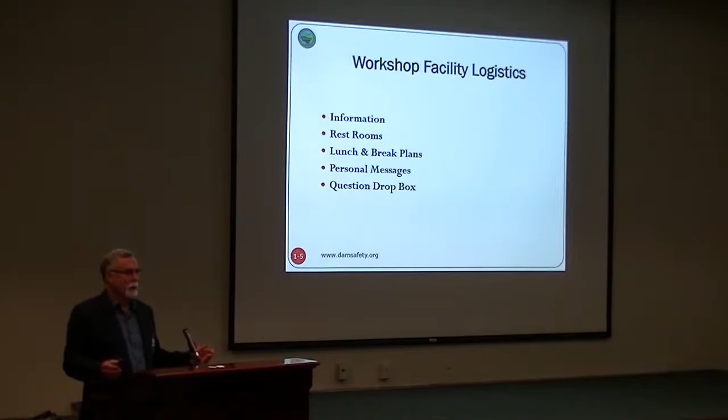So these workshops would not really be possible if the Association of State Dam Safety Officials, which is ASDSO, wasn't involved. And also FEMA does a lot of funding for these state programs. So between FEMA and ASDSO, that's what makes these workshops possible at a low cost. I mentioned you got the handouts in your bag, so refer to those as we go through at the end of the day. But there's a lot of good information in your bag.

A little bit about what ASDSO is. It's really a nonprofit organization. It's developed by the state dam safety officials. And there are 49 states that have dam safety programs. Alabama is the only one that does not.

ASDSO was established in 1984. But a little history, when I was with the Georgia program, Georgia, South Carolina, and North Carolina started what they call a tri-state dam safety conference. The very first one, I believe, was in 1980. The first conference was actually in Greenville, South Carolina. For the next 2 years, the next one was in Atlanta, and the next one after that was in Raleigh.

And then we decided, those 3 states, to say, why don't we make this a Southeast dam safety program? So we actually had a program in Orlando, Florida, for the southeastern states. But we invited all the states, and we said, all right, this thing is growing, we got to start looking at a national program. That's where it started in Orlando. We got most of the states came. We actually started a national dam safety program. And that was really the roots for the ASDSO as you see it today.

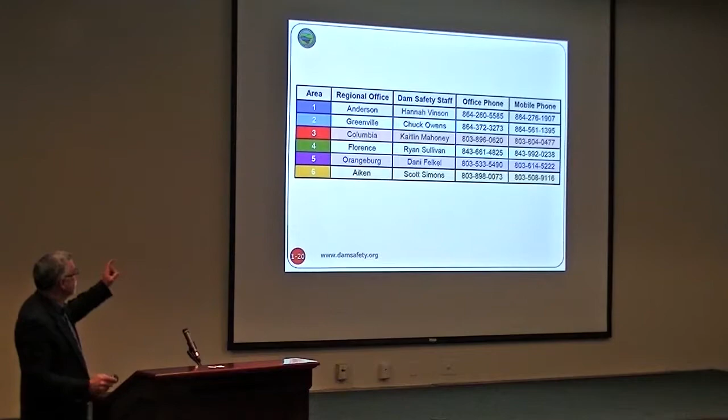Hannah is right here in Region 1, Chuck in Region 2, Kaitlin in Region 3 - though Kaitlin's not with us. Ryan in Region 4, right here. Dani in Region 5. Region 6 is actually vacant at the moment - Scott is still involved with the program but he's no longer in the region, so that's a vacant position currently.

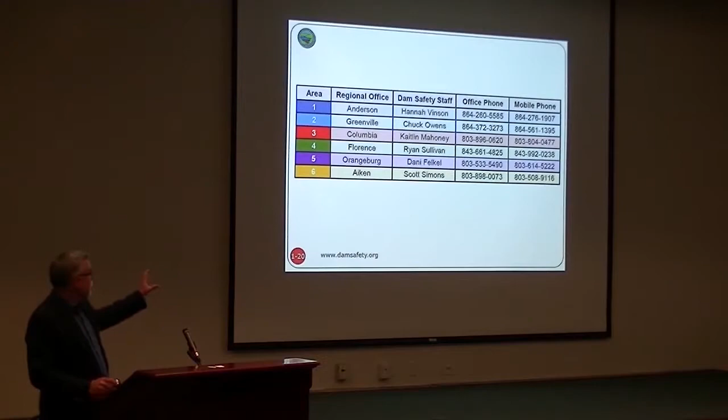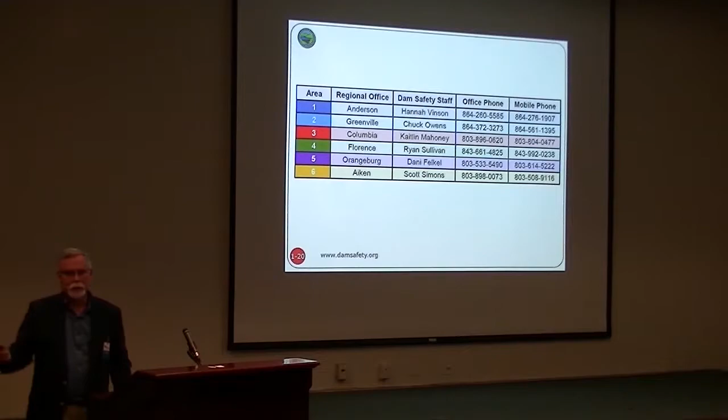This is their contact information - it'll be on that CD, but get to know them. That's your local resource in the region. Then you have the state office with Jill and John.

Additional resources: the U.S. Department of Agriculture, the NRCS, used to be the Soil Conservation Service. Those of you with gray hair will remember that. Back in the day they would actually design and pay for building a lot of farm ponds for irrigation and cattle drinking. So a lot of the older dams all over the U.S. had the Soil Conservation Service involved in designing those farm ponds. Now it's the Natural Resources Conservation Service, and in a lot of states they built what's called small watershed or flood control dams - there's over 10,000 of them in the United States.

They're a good resource with a lot of design aids since they were involved with so many dams. Your local water conservation districts can also be a resource - they have a lot of information on how to repair or maintain a dam. So get to know that person, they can help you too.

For bigger dams, you're talking about the Corps of Engineers, the Bureau of Reclamation, the Federal Energy Regulatory Commission. If you've got bigger dams and want to get really technical, they've got a lot of publications on dams that you can download for free if you're interested in the subject matter. And then there are local engineering consulting firms - a lot of them in the Southeast work on dams and have a lot of history and information on dams too.

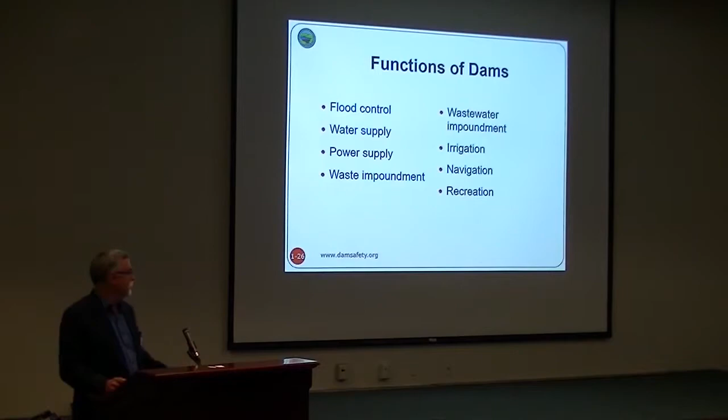Flood control - a lot of these NRCS flood control dams are strictly for flood control. Water supply - many municipalities have reservoirs for that. Hydropower, like South Carolina Electric and Gas. Waste and wastewater impoundments - you'll see this at a lot of water treatment plants, generally small dams used for sediment, dropping out sediments in the lake before they treat the water. Irrigation for farmer use, navigation along the rivers with lock and dams, and almost every lake has a recreational component.

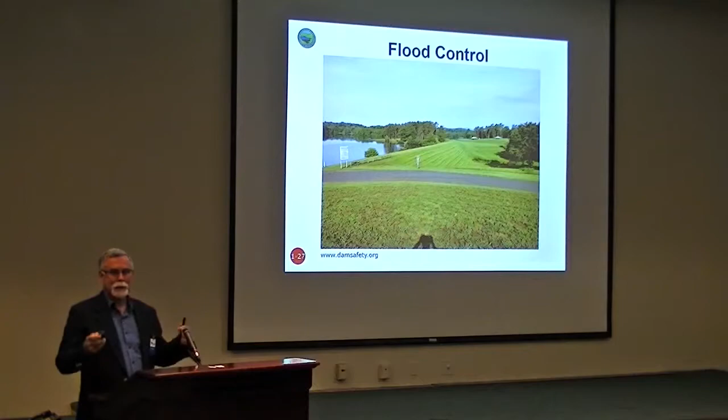The flood control, this is a typical NRCS dam, and a lot of times they'll have a reservoir out in the lake, but a lot of times there'll be a large distance in elevation from the lake level to the top of the dam. That's the flood storage. So if you have a big storm, the lake goes up, slowly drains back down.

Water supply can be any type of dam, but there's a lot of them in South Carolina, obviously. If you're going to have these water supply departments, you can't just pump from a river or a stream all the time because you may be in a drought. So they'll build a reservoir so when there's a drought, there's a pool of water they can draw from

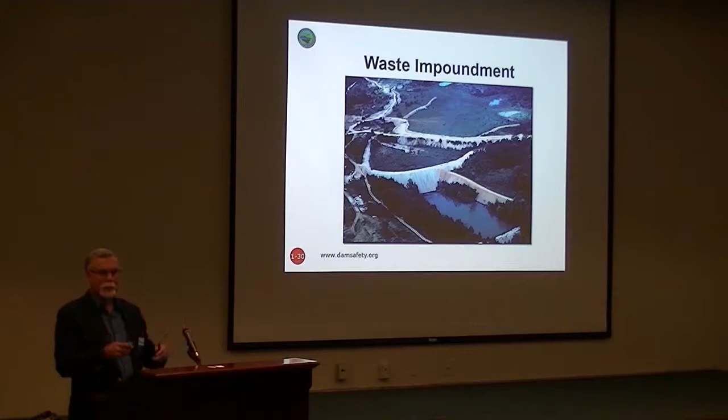to treat. Hydropower, waste impoundment, a lot of clay mines, gold mines, they have to have a place when they're sluicing and cleaning up to get the minerals. They have to pump that water behind the dam to let it settle out before the water goes to the stream. Here's one that the kaolin industry uses a lot of dams. Wastewater storage, usually these are not large dams or large lakes, but there's a lot of them out there.

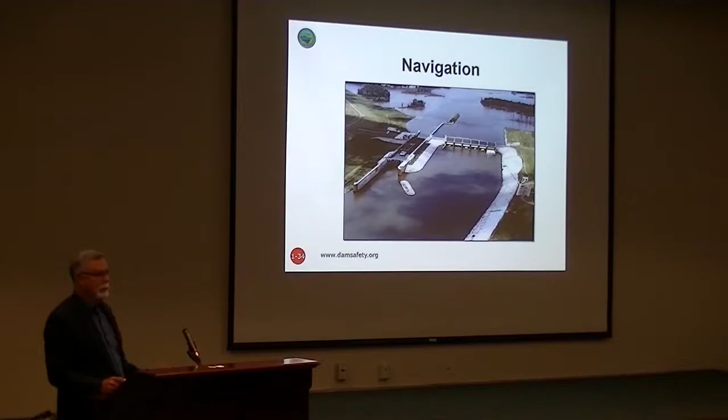Now the irrigation, particularly out west, and then the lock and dams along the rivers themselves. So here's actually, like in this case, the dam and the spillway, they're all, a lot of times they're one and the same, and then here's the lock chamber itself. And then, like I said, almost every component is recreation.

Quickly, type of dams. Over 90% of the dams in the U.S. are earth-filled dams. So the vast majority, generally it's cheaper to build a dam out of earth if you have it. You can have rock fill where most of the dam looks like a pile of rock, but in the center there is an earth component to keep the water from flowing through.

Concrete gravity dams are old masonry dams. A lot of the old mills in the southeast that are masonry dams built out of rock. Gravity dam is just like the word. They're built out of mostly concrete and they're there with weight. The gravity is what holds it down and keeps it from tipping over.

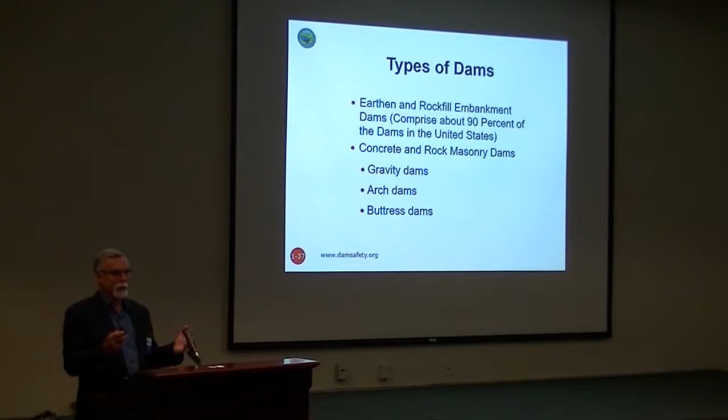You can have arch dams. You see some large ones, particularly in Europe. And an arch dam is designed because you don't have to use a lot of concrete, using the curvature of the dam to resist all the forces wanting to turn the dam over. So you got to have the right geologic formation to have an arch dam.

And a buttress dam I'll show you. In the old days when labor was cheap, you see a lot of buttress dams. But now that labor is not cheap, you don't see really any new buttress dams being built.

Then there's the oddball dams. You can find a steel dam, not many. What's called a rubber dam - a lot of times nowadays you'll see some fairly large dams, actually they're rubber bladders that hold back the water, and wood or timber crib. And those are generally your older dams also.

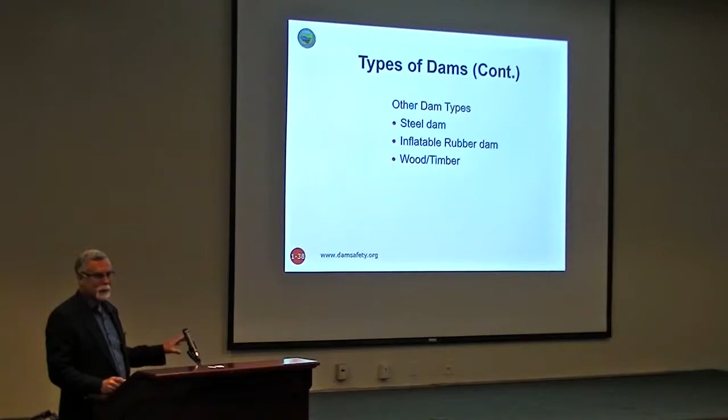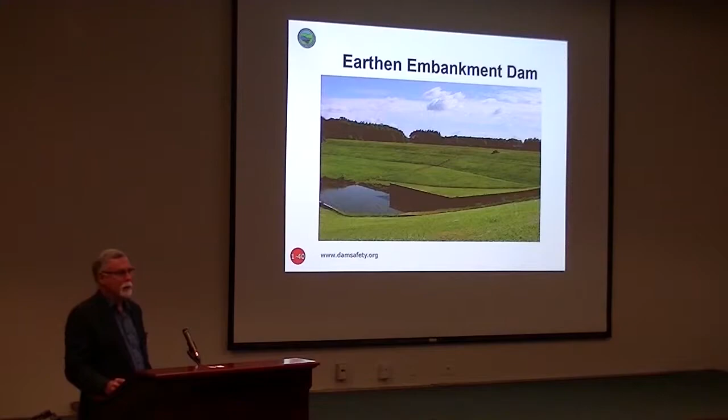Earthen dams are just like it is. It's earth, grass. It may be a zone embankment. It may be made up of a couple of different types of earth. But like I said, over 90% of them in the U.S. are earth dams. You might recognize this as Saluda Dam.

The original dam, which is the green part, was what's called a hydraulic fill dam. It's basically earth, but the center of the dam, the way they built it, was they pumped water into it, let the water settle out, and that would be your clayey fine material. The problem with that construction - you have an earthquake, that material that was pumped in there becomes liquid again and causes the dam to fail.

It's referred to as a buttress dam. You can tell it doesn't use as much concrete as a gravity dam. Back in the day when labor was cheap, you could do all this form work, but nowadays, because labor is not cheap, you don't see many buttress dams being built anymore.

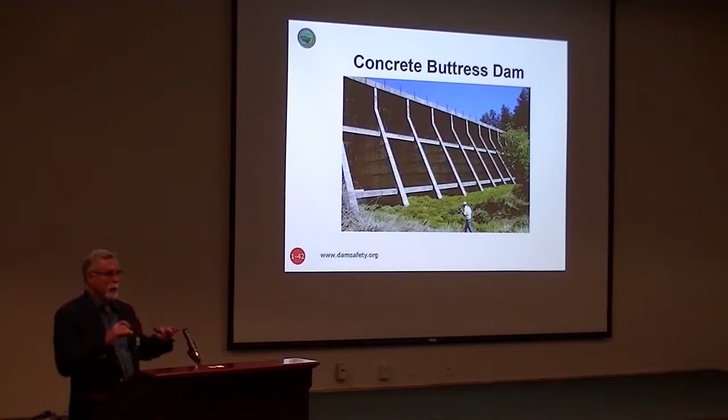The problem with these, particularly in an earthquake zone, is when the earthquake wants to move the dam left and right, a lot of these buttresses would collapse. So the way they fix those is they basically infill between each one of these buttresses with concrete, making them more like gravity dams. That was the repair method to make them resist large earthquake events.

The only steel dam I'm aware of is actually made out of steel. I don't know if you're going to find any in South Carolina. A rubber dam, you don't see the dam, but it's actually a big rubber bladder, and they just put air in it. This is one in Arizona, and actually they replaced it. They changed it because you can imagine the heat and UV light deteriorated the rubber. They actually had one of these break, deflate, and drain their lake. So they ended up putting in steel gates maybe 2 years ago. You see a lot of smaller rubber dams, maybe 5, 6, or 7 foot high, but these are like 30-foot high rubber dams, one of the biggest ones in the U.S.

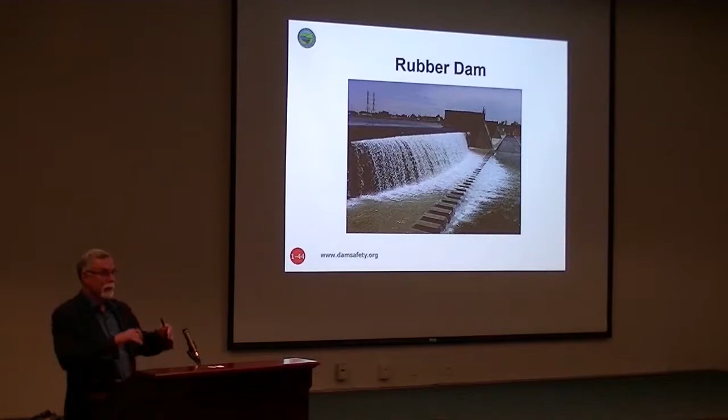Timber crib, an old dam design. Even here they're restoring one with timber crib. Basically, it was timber crib and in between was rock. So you say, well, doesn't the dam leak? Hell yeah, it leaks. But the problem was, they're on such a large watershed, it can still leak but still keep a reservoir. You would have water just flowing through the rock, but there was enough resistance that it wouldn't drain the lake. So a lot of old ones are built this way, kind of a run-of-the-river type structure.

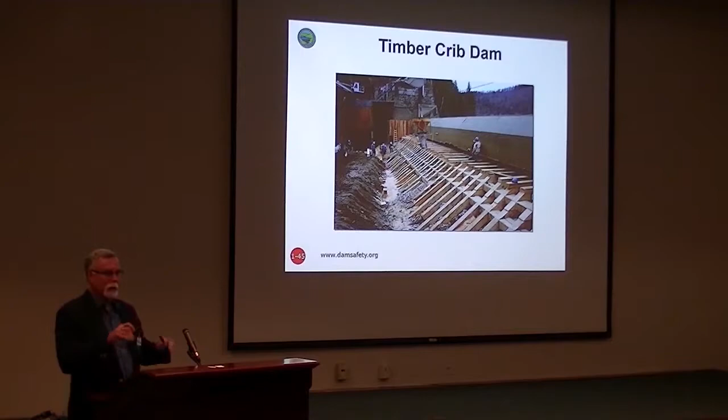But you got to remember, regardless of the type, you got to inspect it, you got to maintain it. Each one has a little different set of things you got to look for. We're going to mainly focus our comments on earth-fill dams, but if you own a concrete dam, please, if we don't address your comment, ask a question at the end of the day.

Let's talk about parts of the dam. I want to make sure when we use terminology as engineers, we're all talking the same language.

Reservoir is an easy one. The principal spillway is the spillway that controls the normal pool of the lake. Generally, it's a riser structure out in the lake connected to a pipe that goes to the end of the dam - that's called the principal spillway. The upstream slope is the slope on the water side. The crest is the top of the dam. The groin is where the dam meets the natural ground, and that's important because a lot of problems can occur where the dam meets the natural foundation.

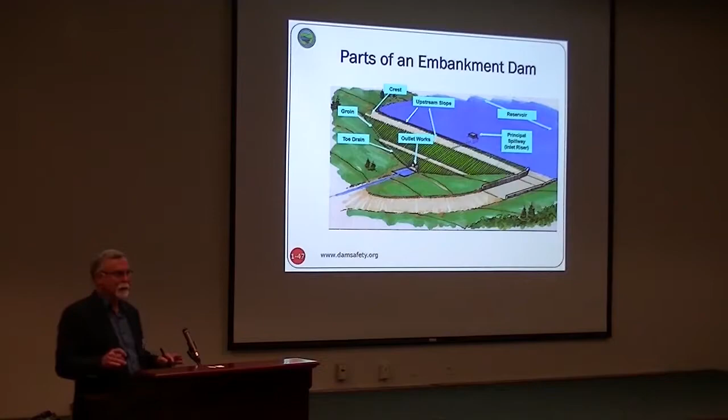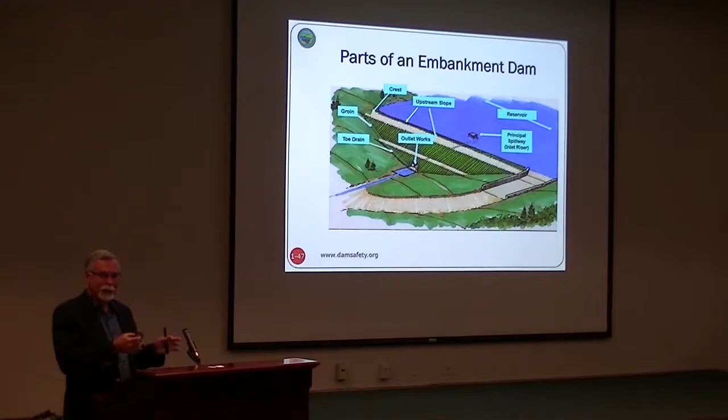The outlet works is where the pipe comes through the base of the dam at the downstream slope. A toe drain is what prevents a dam from seeping, because keep in mind, all dams will leak - that's guaranteed. What you want to do when water comes through the dam is collect it. So what we call a toe drain, we may also call a trench drain or a chimney drain, is actually a drain made out of aggregates, generally sand and gravel, that's in the dam to collect that seepage before it comes out the back side through a pipe. Most old dams don't have them, but any new dam will have some type of internal drainage system.

That's where you have a toe drain outflow. What's good about it is you want to be able to measure the flow of water coming out of these drains, because that's an early indicator if you've got a problem. That flow should almost be fairly constant, but if you see it triples in rate or it goes away, something's probably bad going on inside your dam. If muddy water is coming out, that's a problem too - it should always be clear, almost like a spring, because it's going through a sand filter. But if it becomes muddy, you've got a problem.

So those are the type of things you look for when you're mowing your grass - you take a look at your toe drain. Now I got water coming out, I never had water before - those are early indicators of the possible distress of the dam.

Emergency spillway, or what's called an auxiliary spillway. If you have a big storm event, those are the spillways where the floods go through. Sometimes they're concrete, but most of the time they're what we call vegetated, grass-lined spillways.

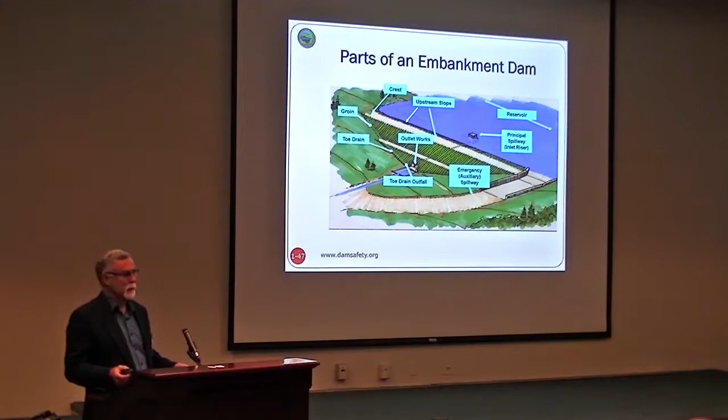I'm going to take a slice through a dam now, and this is a well-designed dam. You have your riser, it goes through the outlet pipe. This is what's called a zoned embankment, made up of two different types of soil. The core is your more clayey, impermeable soil, and the shell material, the soil on both sides, can be less impermeable.

In this case, you have a vertical filter drain that goes to a blanket drain, so any water wanting to come through this material gets into this drain and drains out. It keeps the back of the dam dry. That's the main purpose of these drains—if the back of your dam becomes saturated, it becomes unstable, and you can potentially have a slide and lose the back of the dam. So these drains keep the back of the dam dry.

Sometimes you'll have a berm, or a dam will come down with a berm. On a tall dam, you generally have berms because otherwise rainwater flowing down a 60 to 80 foot zone is more inclined to erode your dam. So a lot of times you'll break that up with a berm and collect that water, running it off to one of the groin areas.

Here in South Carolina, on the coastal areas, there's a lot of sand, and water goes through it fairly quickly. If you have a dam, you've got to have a cutoff to prevent water from running under the dam. So you have something like a sheet pile wall or cutoff trench to make that water's path more difficult to go under the dam. One thing you want to do is increase the path seepage has to follow, which decreases the velocity and decreases the quantity. So you just want to increase that seepage path.

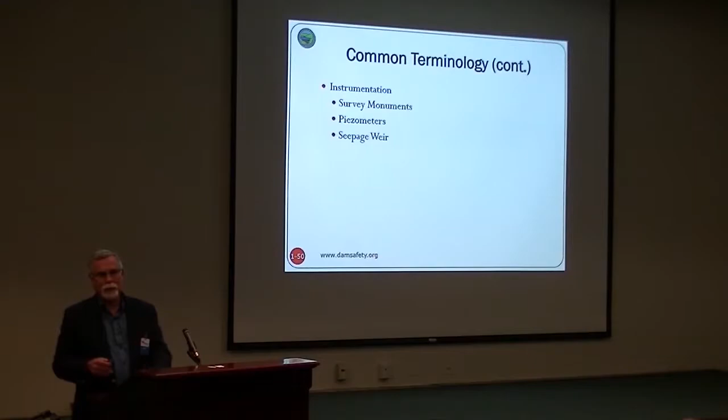Downstream slope, pretty obviously, is on the downstream side of the dam. Abutment and groin—as I mentioned, here's the dam, here's the natural ground, so this is the abutment and groin. Like I said, you can build a real good solid dam that will minimize seepage and be very safe.

But what's also trying to occur with that reservoir is water trying to go through the natural ground too, and you don't know what that consists of. So you've got to be careful, because sometimes your dam may be perfectly dry, but the next thing you know, you've got water coming out of the side, and you can have a failure of the foundation of the dam—if the foundation fails, that will cause your dam to fail. So you've got to not only look at your dam, you've got to look at what we call the abutments, to make sure you don't have water coming out of that.

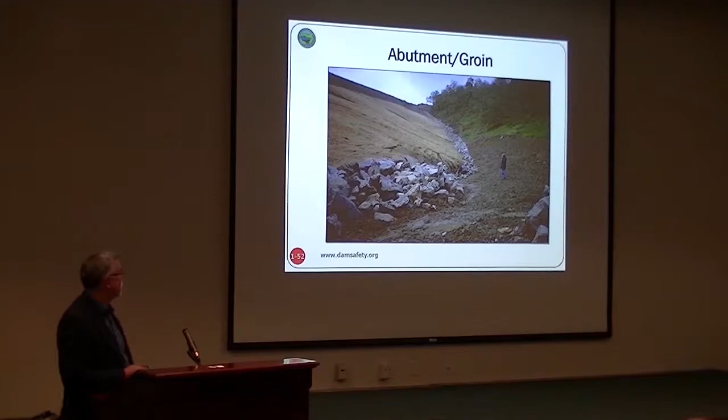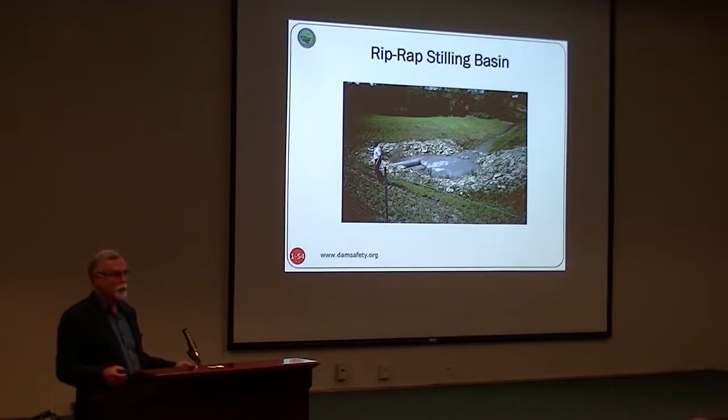When the pipe comes out of the back of the dam, the water coming out of those pipes can be moving 30 or 40 feet per second, and it can really cause some erosion. So you have to have what we call a stilling basin or a plunge pool. When that water comes out, it falls down, and that slows the velocity of the water in the stream.

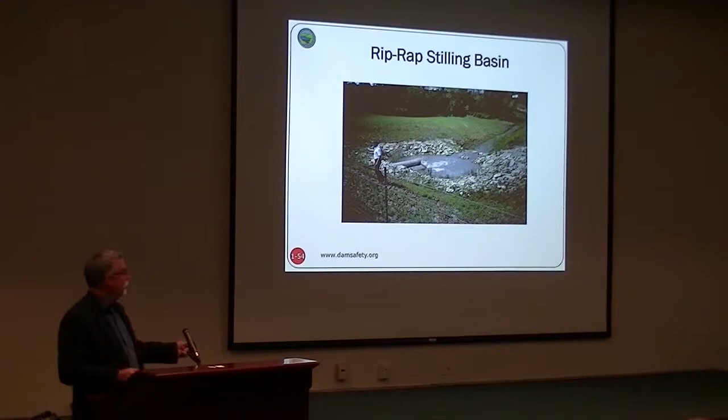So you've got to generally have riprap to protect the downstream area. I mentioned trash guards—here are some examples. You want leaves and everything to go through; you just don't want sticks and logs to start building up, with leaves matting over the spillway opening so your principal spillway doesn't work. You see all types of different trash guards, but you need one to prevent sticks and timber from getting down inside your pipe. But believe me, they're hard to get out once they start going down into the riser pipe.

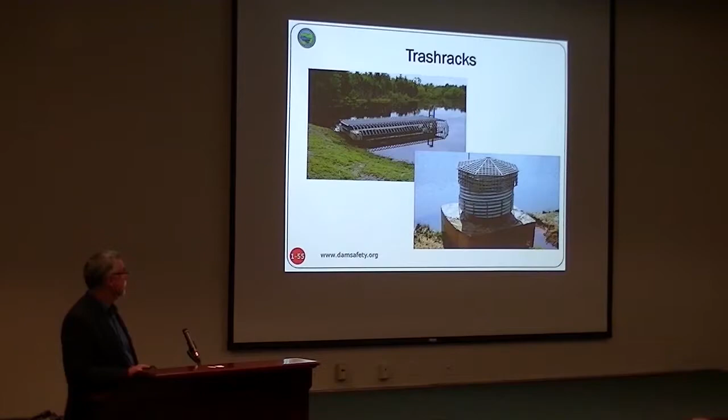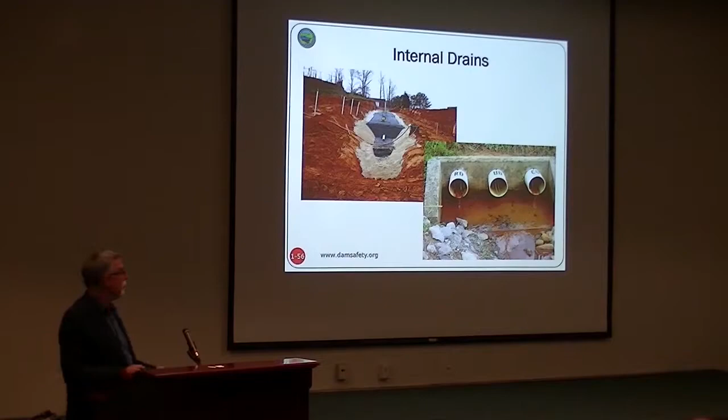And then you have the outlets. Here's the right drain, the upstream drain, and this is called the chimney drain. You label them so you know where the water is coming from. And you'll notice these metal things - those are called animal guards, because animals love to get in drains. These guards keep muskrats and other animals from climbing up into your drain and building a nest. That's important, because if they get up in your drain, they'll clog it up.

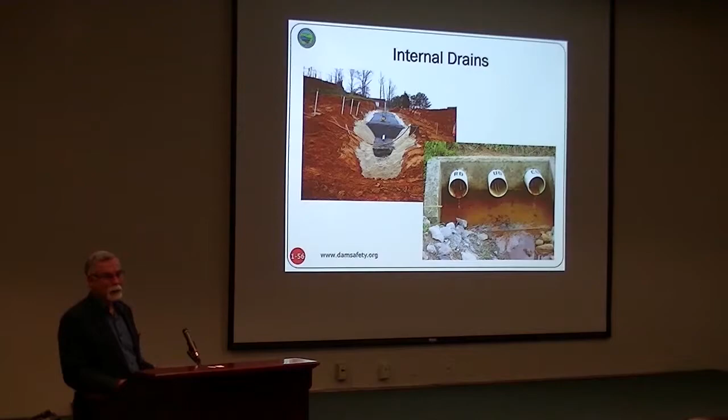The riprap - if you've got a big enough lake, you have to worry about wave action causing erosion of the upstream slope of the dam, and generally riprap is used to prevent the wave from eroding the face of the dam. If you've got a small lake, just a grass slope is adequate.

We use the term freeboard - that's the distance between the lake level and the top of the dam. As I mentioned, every dam acts as a flood control dam, it holds back some water. I'll show you later what's important in terms of your spillway capacity - a lot of it is based on that distance from the lake to the top of the dam.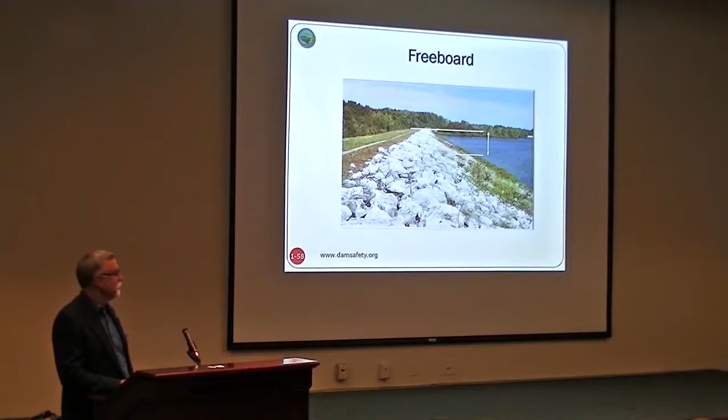A little bit about instrumentation. Monitoring wells are basically holes drilled in the dam. They've got a perforated pipe, they've got sand around it, and it measures and shows you where the water level is inside your dam.

It's important because when you measure those, that water level, unless you have a real long period of rain, should stay about constant. You measure if it's going up or down - something's going on inside your dam. It's generally not a good thing.

Seepage weir - if you don't have those drain pipes I showed you, a lot of times it's just a channel going into a V-notch weir, and you can measure the flow rate coming out of the V-notch weir. There are different levels of instrumentation - Saluda Dam has a ton of it. Obviously it's a large dam, so there's a lot of different, more complex instruments. But for probably 99% of you guys, you may eventually have a monitoring well, you may eventually have a seepage weir.

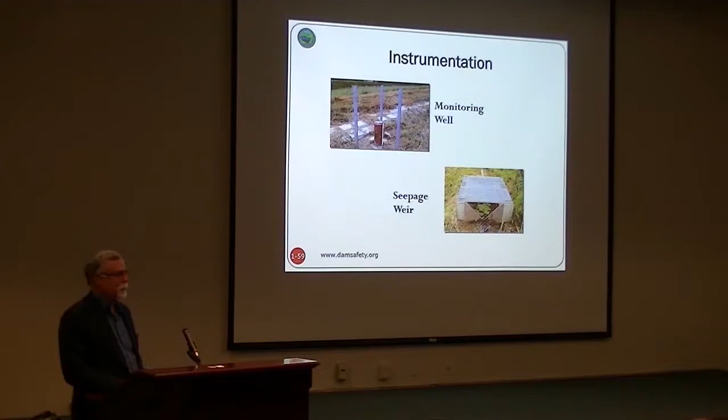Quickly on types of spillways, because there are different types and reasons for different types. You have conduit, which are pipes or culverts, open channel spillways, which is just like it says an open channel, and then you have what's called weir spillways, and there's different types of weirs which I'm going to go over. This is the only math we're going to do today, so don't worry.

This equation is important though. I want you to understand, when you're talking to an engineer, Q is the capacity - it's like cubic feet of water per second. The equation tells you how much water your spillway will pass. There are three variables: C is a coefficient, it depends on the shape of the top of the spillway, and I'll talk about some of those. That value can range from about 2.5 to 3.5.

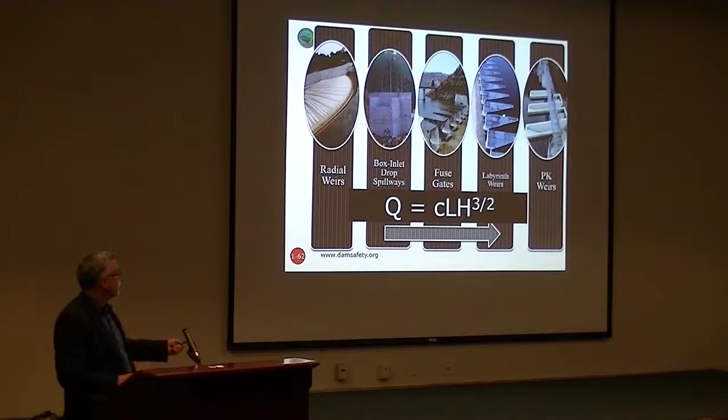L is the length of the spillway. Simple - if I've got a spillway 100 foot wide, that's pretty straightforward. But nowadays you've got different shapes of spillways to increase that length within the same width of channel. For example, this is a labyrinth spillway, so it's kind of like a zigzag - your length is actually the length of each one of these segments, so you can get it very long.

What's important is the H, because that's raised to the 3/2 power. So the H is the height of water over the spillway.

So if you need a lot of spillway capacity, increasing the H is better than trying to change the C or the length. And this goes back to freeboard. If you've got, say, 5 feet from normal pool to top of the dam, that's what your H is. A lot of people say, well, I need more spillway capacity. The best way is to increase that H. Lowering your lake increases that H. Raising the dam increases that H.

So a lot of them, you talk to the engineers, they're going to come to you and say, can you live with your lake being lower 2 feet? If we do that, that H number goes up. Or is there a practical way to increase the height of the dam a little bit? Again, that gives you that H. So those are things, when an engineer is talking to you, you've got to make a lot of long-term decisions. But that's the equation that tells you my capacity to spill.

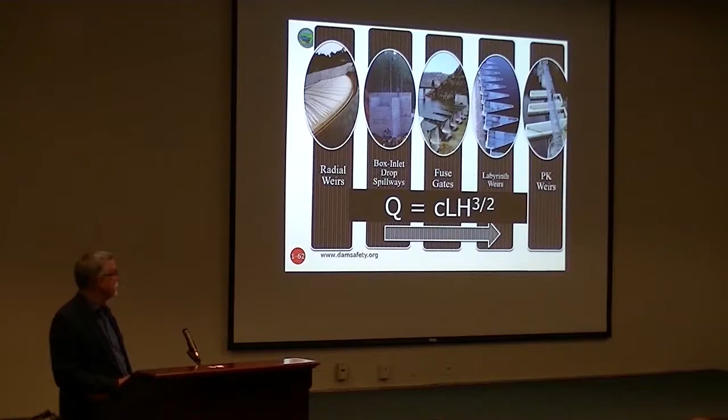A little bit about conduit spillways. Usually it's a vertical riser pipe connected to a horizontal outlet pipe. In the old days, those pipes were made out of corrugated metal, and those have a design life anywhere from 20 to 40 years, and eventually they rust out.

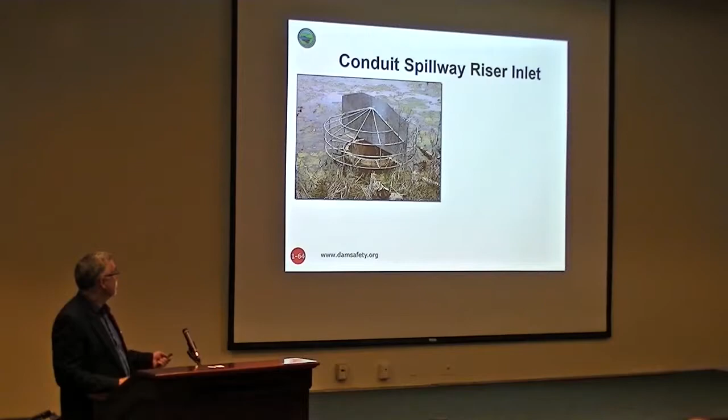Let me show you kind of a cross section. Here's the inlet, the pipe. In the old days, we used to put what's called an anti-seep collar, because any penetration through a dam is a weak point - that's where the water is going to flow around along that pipe. So to prevent it or minimize it, in the old days we put these collars so that when water is running along that pipe, outside of the pipe, it has to go around these collars, increasing that seepage path.

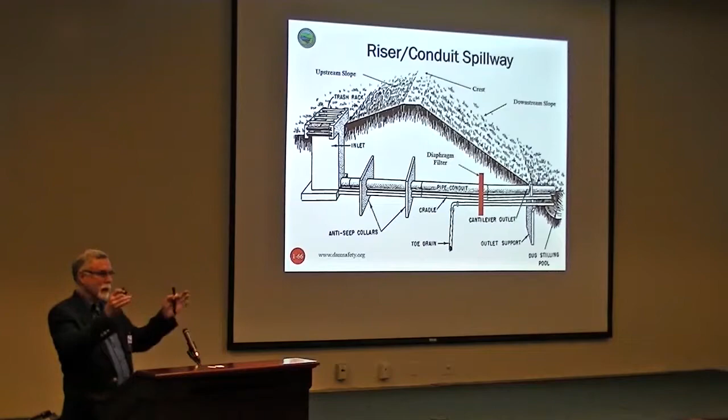You increase the seepage path, it slows the water down and prevents it from generally causing a big problem. But we found over the years that those are difficult to construct, and if you don't compact the soil around it really good, then it really doesn't do you any good. Nowadays we don't use them - we use what's called a diaphragm filter. It's a sand collar, if you will, around the pipe.

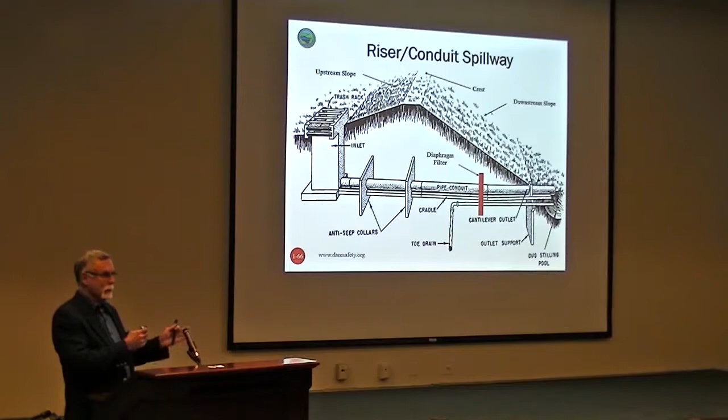So if water is leaking along the pipe, it hits that sand. The key to that is, again, water coming through a dam is not sometimes a big thing, but if it's carrying soil with it, that's when you create problems. So over a long period of time, carrying that soil will end up with a void in your dam, and your dam may collapse. So these collars prevent the soil from leaving. It doesn't prevent the water from leaving, but it prevents the soil, and that's an important aspect of it.

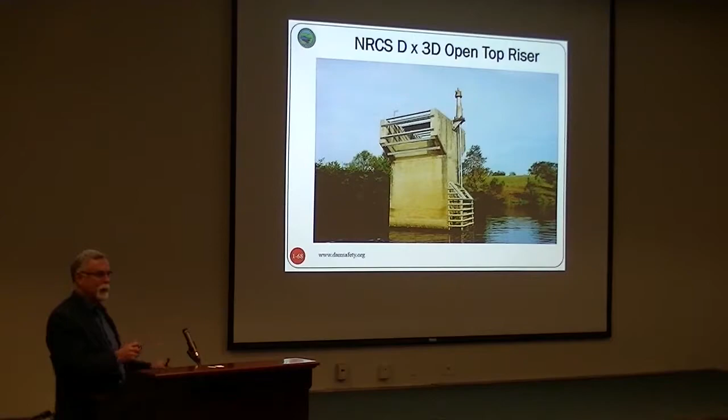This is an NRCS small watershed flood control project. You see what's referred to as the D by 3D - their riser structures are generally D width and 3D long. They're rectangular. They found over the years through research that for their type of application, that shape of riser is the way to go - it's the most efficient.

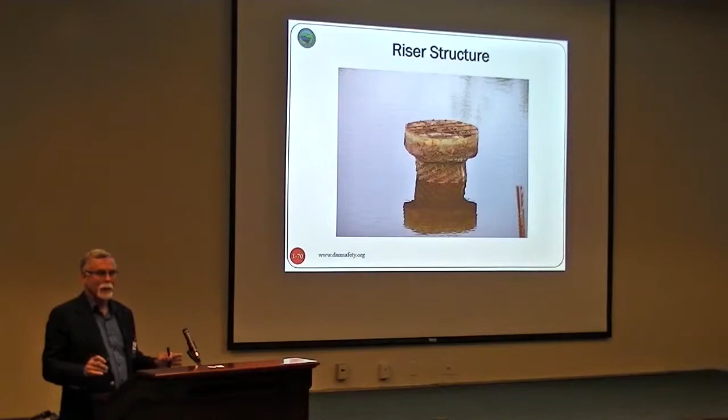They work fine for a long time, then eventually they're going to fail. Here's one where you can see the condition of the trash rack - the erosion, the corrosion - they actually put a concrete cap around it where they had a leaking joint. But these things are just a ticking time bomb. They will fail, so if you have them, it's just a matter of time. You need to really start thinking about replacing them if they're more than 20 years old.

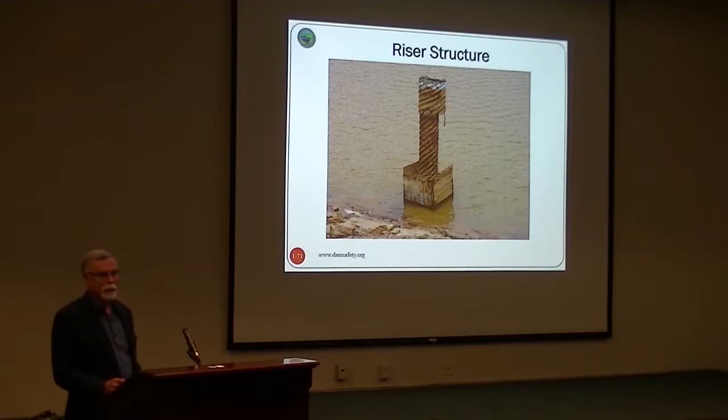Let's talk about outlet protection. When these pipes flow full, you get 35 to 40 feet per second of water. This is a 30-inch pipe, and it can create a small Grand Canyon below the dam if it's not protected. Here you see the riprap. You've got to protect downstream, because otherwise that erosion starts eating back into the dam itself, creating problems.

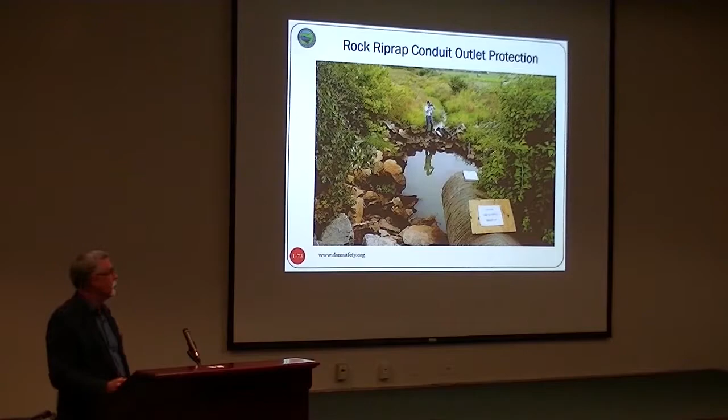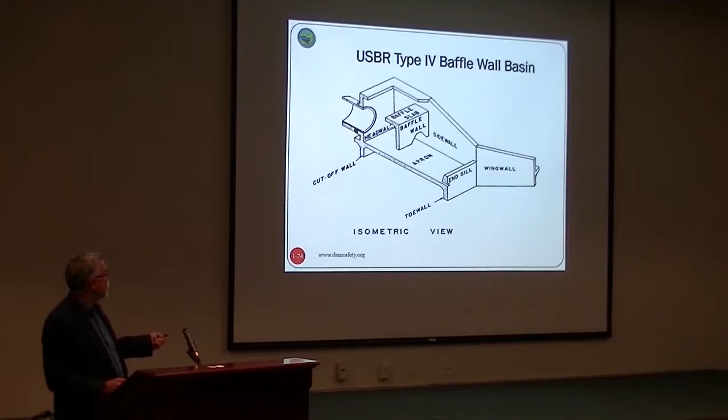Sometimes plunge pools, riprap is generally the simplest way to go. Here's a U.S. Bureau of Reclamation baffle wall basin. The water comes out of the pipe, hits this wall, drops straight down, and then flows up. This is what they actually look like.

Here's what's called a drop spillway. If your dam's not very high, the best way to dissipate energy is to have that water drop down vertically, making that velocity go vertically and not horizontally. The water comes into this and drops straight down over this head wall into what's called an apron, and then flows out of the channel.

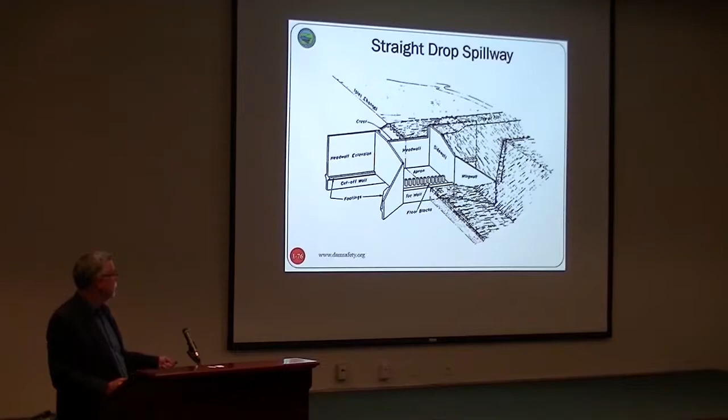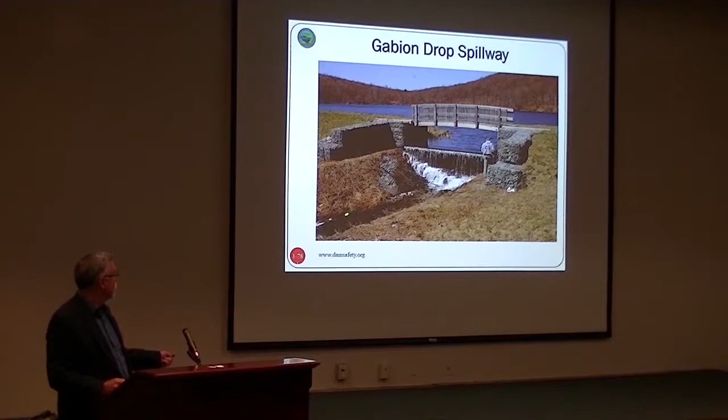Here's one made out of gabion - a wire basket filled up with stone. So instead of concrete, this one is just made out of these gabions, but it's the same concept. The water drops vertically down. You can see in the channel itself there's no riprap because the velocities are very low.

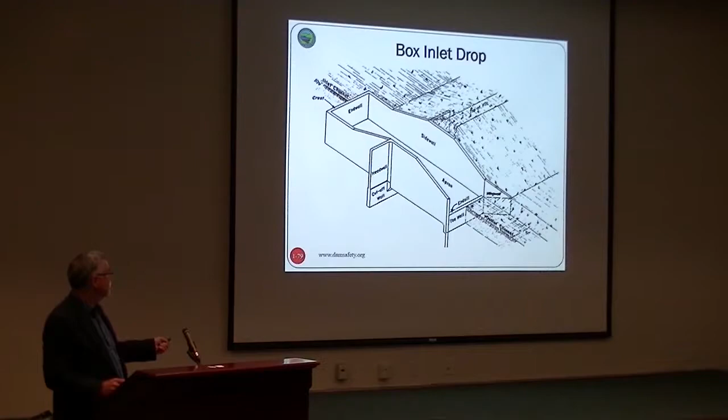So here's one - when the lake's full, it can flow over on 3 sides. The problem with this, it's almost like a boat - that spillway is going to want to float. So these concrete structures have a lot of mass to prevent them from floating up. While you increase that L to get spillway capacity, you add a lot of concrete to keep the thing from wanting to float.

If your dam gets high, you can't have these drop spillways. You can't have a vertical drop of 50 feet. So now you've got to get the water from the top all the way down to the toe of the dam. You generally do that with a chute spillway.

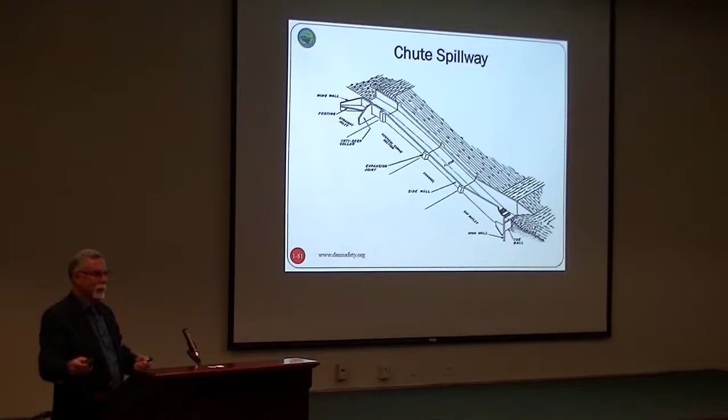Now we're talking big bucks. So now you've got not only the weir structure up here, you've got all this concrete, and this water is going 35, 40 feet per second. You've got to have a nice stilling basin to get that 40 feet per second down to like 7 feet per second when it goes out downstream.

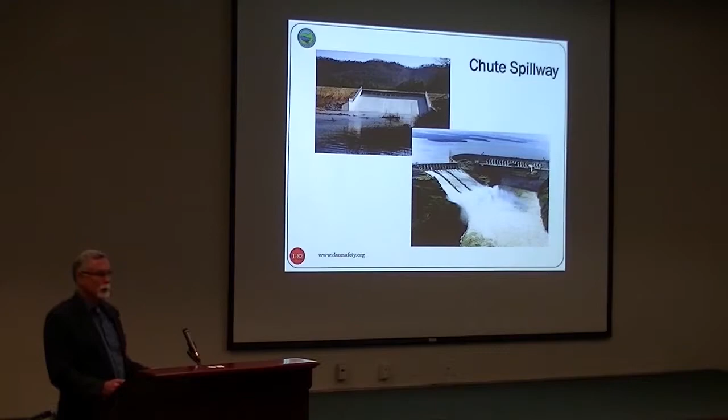They can be these large dams all over the world with these huge spillways, passing millions of CFS. Here's one that's not flowing, but they're expensive because there's a lot of concrete. You don't see many of these.

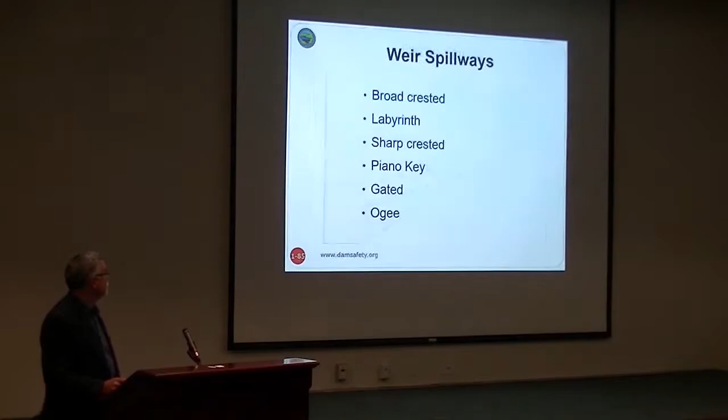Let's talk about the weirs, because this is where that C factor comes in. We've got generally 6 different types of weirs. What's called a broad crested weir is when it's flat, right across the top of that water. This is the least efficient of all the weirs, but they're easy to construct. You see a lot of them.

This is an ogee weir. Now that C goes from a 2.5 maybe to a 3.5, and you make them with curvature. But you can tell it's a lot more concrete and a lot more finishing - a little more complex, but it costs more to build.

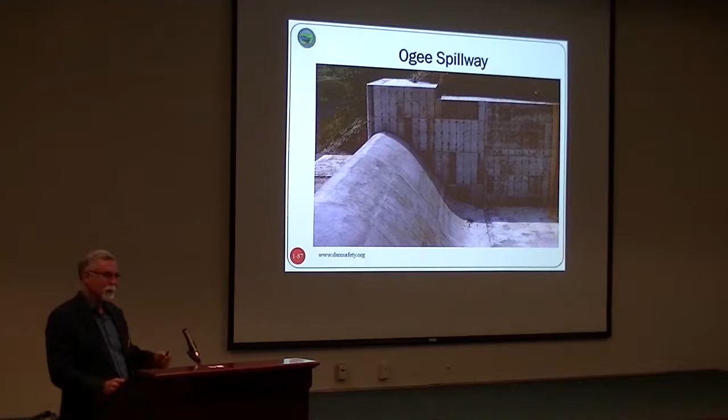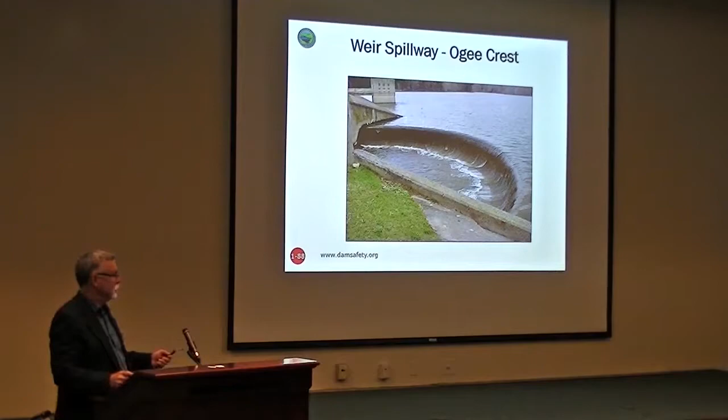And here's a weir - instead of being straight, they made it curved, so you get the ogee, but you also increase the length. So now I'm getting a little more capacity by making it a curved ogee weir.

Have you ever been out to Hoover Dam? They have these side channels, and here's an ogee section. The water flows over here, then runs down the channel, and at Hoover Dam it goes through a tunnel.

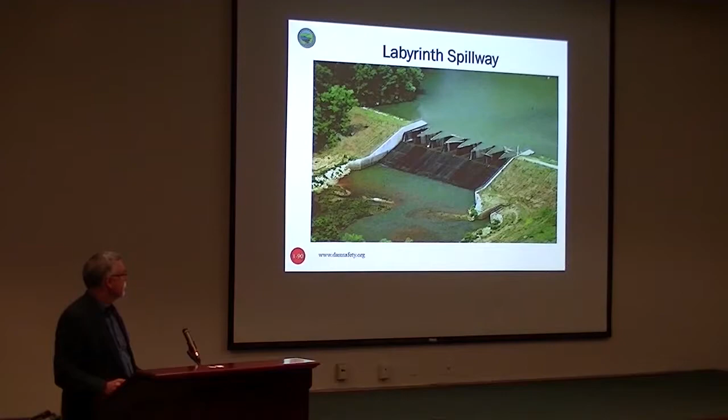Nowadays, you see a lot of what's called labyrinth weirs. We want to increase that L, but we do not want to make the spillway real wide. So you see the L is lengthened by all this zigzag. Very popular these days—they're concrete, with a small chute, so the water goes over these and runs down the chute into the spillway.

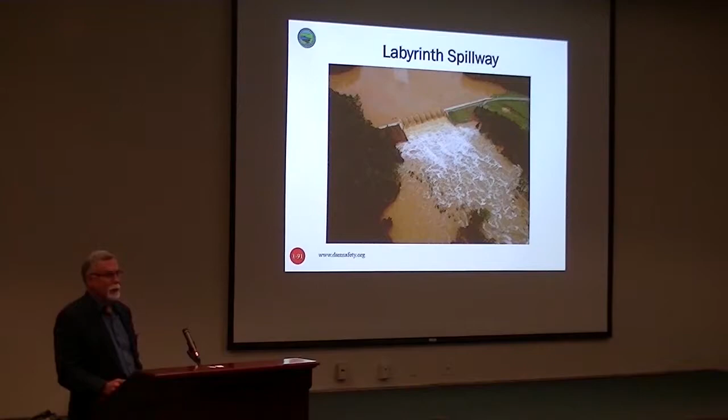Here's one operating during a flood in Georgia. They pass a lot of water. They can be different—what we call each one of those zigzags is called a cycle. So here, each one of these is a cycle.

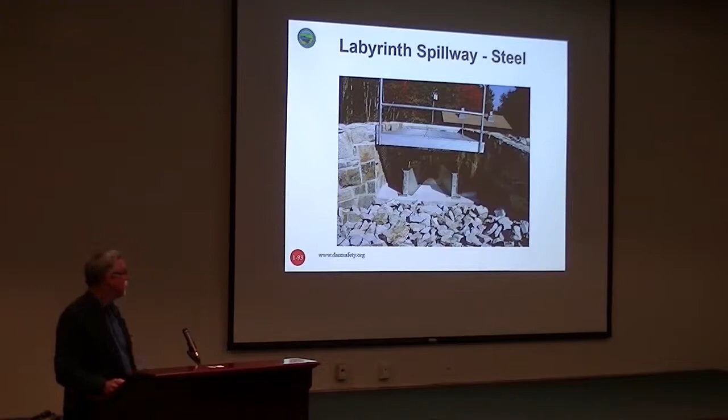Here's one made out of steel, a small one. Instead of concrete, the zigzags are made out of steel plate—not very hard. This one with a single cycle has a county road on top of the dam, again with the chute.

So when your engineer comes to you and says we've got to somehow get a lot more water through your dam, those are the kind of options he's going to sit down and talk to you about—the advantages and disadvantages and the cost. And you can well imagine, when we start talking concrete, they're not cheap.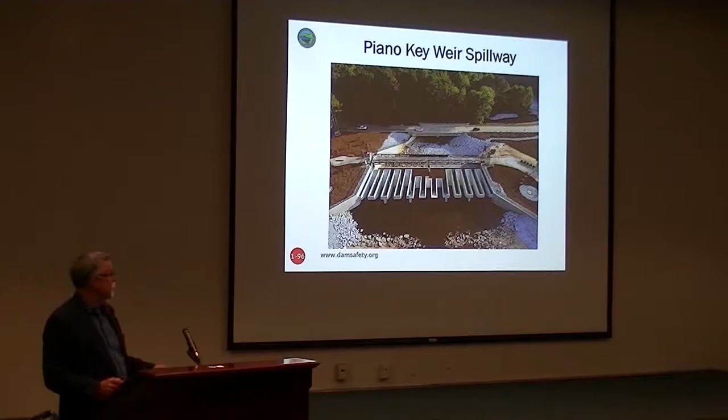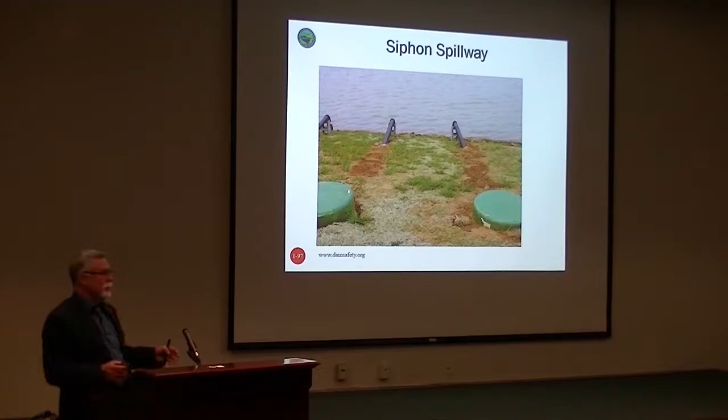Sometimes you just have to have a concrete spillway. Siphon spillways—a lot of times if you have an old corrugated metal pipe, say a 12-inch corrugated metal pipe, you can just grout those up and abandon them in place, if done right, and replace them with a siphon spillway. The siphon spillway pipe itself is not at the base of the dam, it's right at the normal pool line. This one has a vent pipe out, and they work automatically.

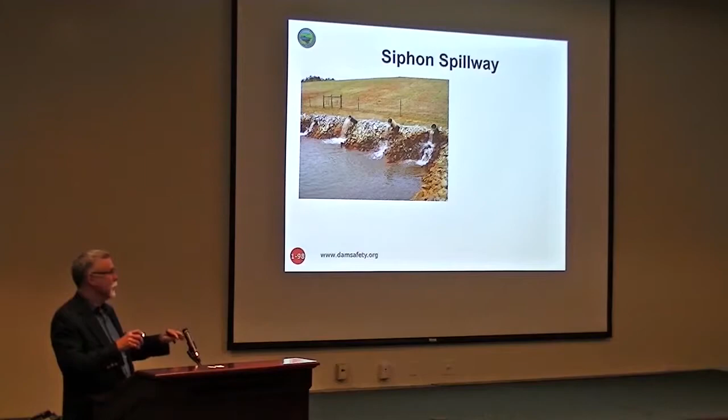And here's one that has 4 siphons. Right now those aren't acting as siphons—at normal pool, water is just flowing through a pipe like normal, so you see water just dribbling out of the pipe. There's not a flood going on.

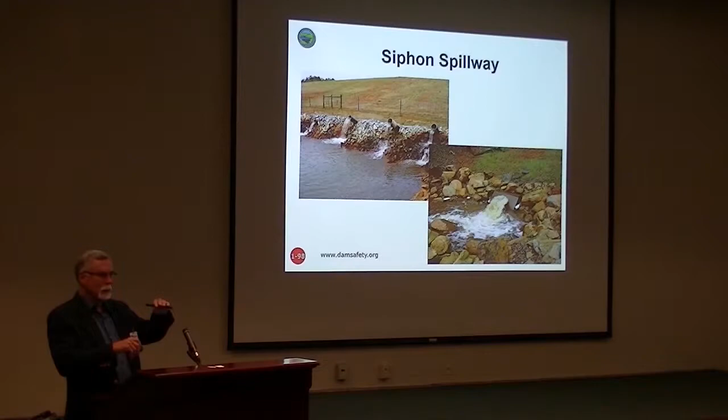So here's one where the siphon action is just starting to kick in. The lake level went up, so now the inlet of the pipe in the lake is completely submerged, and then the siphon starts—this is what happens. Then the lake will go down, the siphon will start sucking in air, and the siphon will stop. So they work automatically.

They're great if they don't have to handle a whole lot of water—they handle small flows on small reservoirs, small watersheds, and they're used quite frequently. You have to have a plunge pool for them; imagine this jet of water coming out, it can cause a lot of erosion if you don't. So siphons are good for replacing old small corrugated principal spillways.

Open channels—back in the day, particularly the Natural Resources Conservation Service built these flood control dams, and the emergency spillway would be a vegetative channel off the dam in natural ground. There are thousands of them built this way.

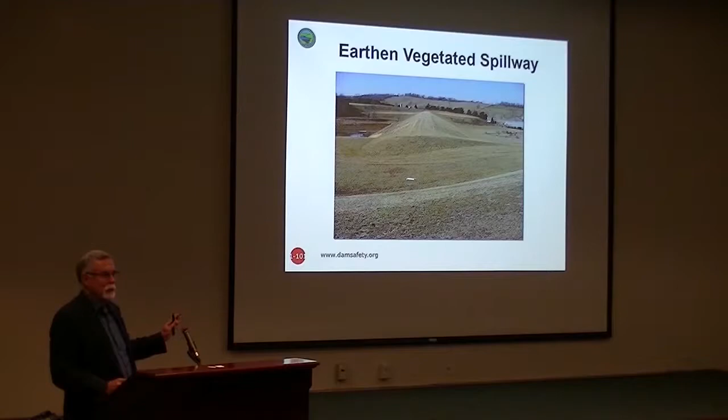We learned over the years, mainly with new computers, that we can model the erodibility of these spillways, and we're finding a lot of them will fail during the design storm. So you're seeing a lot of rehab, where these spillways are being abandoned and concrete spillways are being built over the dam itself. For a long time we went with vegetative spillways, but we're finding they are subject to significant erosion.

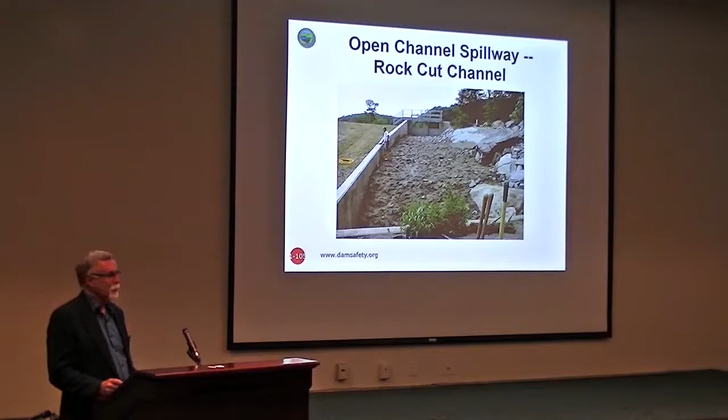If you have a rock channel spillway, a lot of people say rock's not erodible. Well, at certain velocities and flow rates, rock is erodible—it has joints in it. But if you're lucky enough to have a rock spillway, in this case you have a training wall to keep the water off the dam, and most rock will not erode.

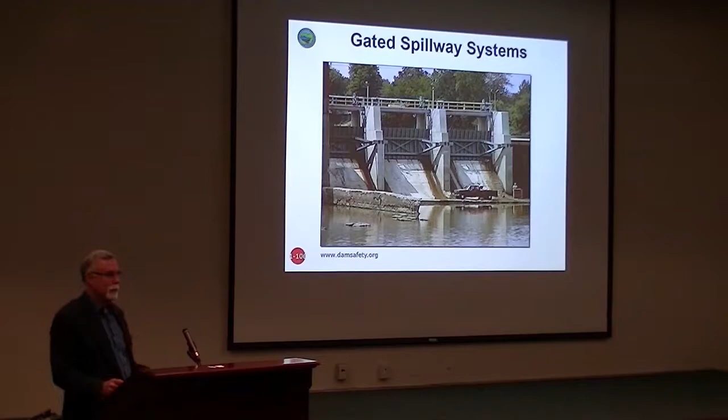Gated spillways can have gates that are huge—sometimes 40 feet high, called radial gates. Here's a small one we put in.

They have a rubber dam—you see this rubber bladder that holds up this metal gate. This one works automatically. When the lake goes up, a sensor triggers the bladders to deflate, and it automatically lowers the gate. When the lake goes back down, the gate goes back up. It's a very nice automatic process for this homeowners association.

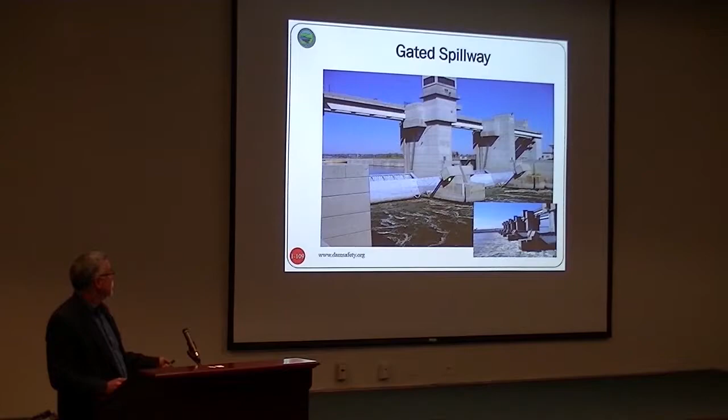Here we have what's called crest gates, made out of metal. And here's a gate for a navigation structure.

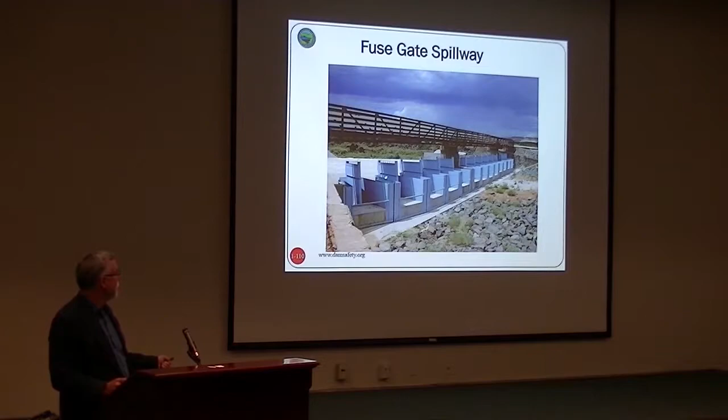These are called fuse gates. The whole concept is that when the water gets up real high, these things actually disengage and go downstream. You actually have to rebuild them, so you don't see a whole lot of them, but in certain situations a fuse gate type spillway will work.

Another big issue is when we have a lot of dams that need to pass a lot of water, but you don't own the land on either side of the dam, so you can't put a new auxiliary spillway in. So we put a spillway over the dam itself—we allow the dam to overtop. To allow it to overtop, we don't want it to erode.

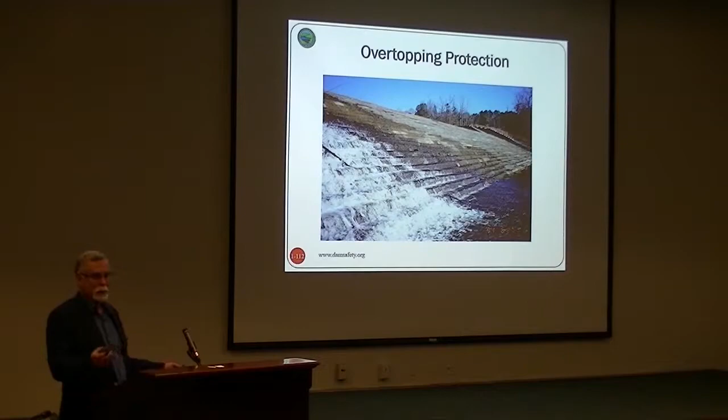So there are a couple ways to do overtopping protection. One is called roller compacted concrete, the way Saluda Dam was built—now it looks like a series of steps. Here's another one. These are generally set so they don't function until at least the 50-year storm, but they serve as the emergency spillway.

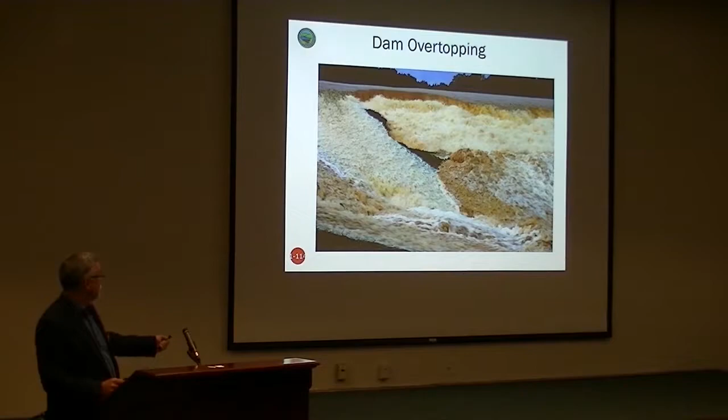This is one in Georgia, in Gwinnett County. Here's the dam—it looked like the dam is failing, right? It's over. In fact, people thought it was, but they weren't familiar with the dam itself.

Well, when the water exceeded capacity, what happened was this dam had RCC overtopping protection. They covered it up because it was in a park, with grass planted over it, so you didn't know this concrete was underneath the soil. But when the flood dissipated, you can see where it washed away some of the soil and kept the dam from failing. So it did its job.

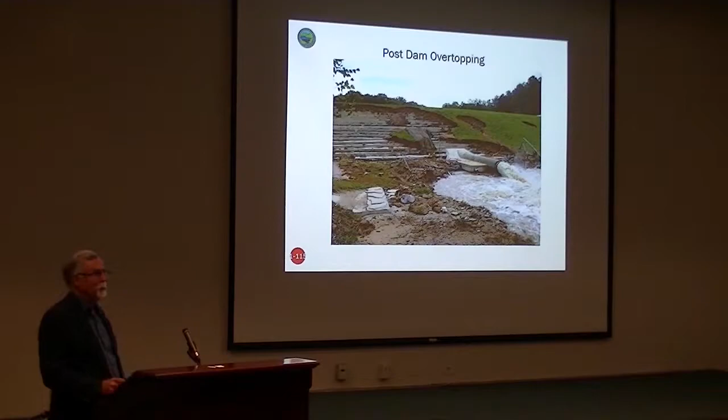Another thing is that articulating concrete blocks can be used for overtopping protection. They're concrete blocks cabled together. Most of these are covered up with soil, so you don't see them anymore. They come kind of like mattresses, and you tie them all together. Like I said, most of these are buried, so you don't see them.

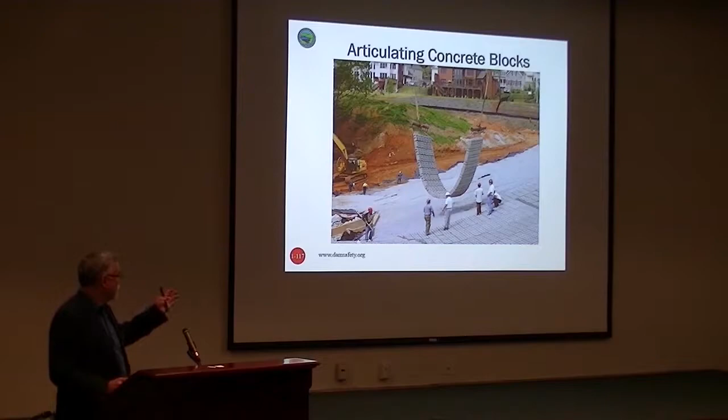So that's the introduction, to get you familiar with the terminology and some of the types of dams and spillways that are out there, because you'll see in other presentations later on, we'll mention some of these again in more detail. So I'm going to turn it over to John.